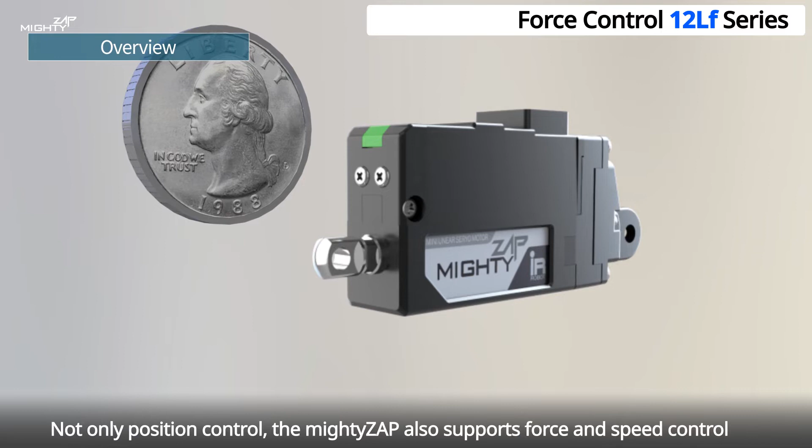Mini Linear Servo Actuator. Mighty Zap has been designed for precise linear position control in small space. Not only position control, the Mighty Zap also supports force and speed control, and there are many other parameters which can be adjusted for custom usage, such as compliance margin and acceleration-deceleration value to change control character.

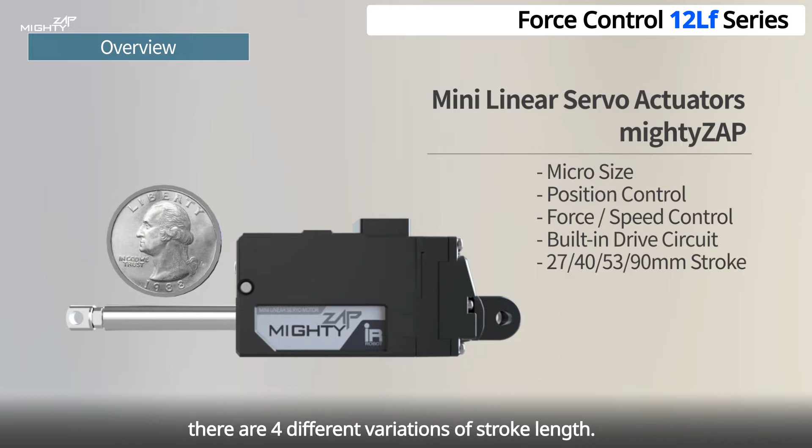From the shortest 27mm stroke lineup to the longest 90mm stroke, there are 4 different variations of stroke length. The Mighty Zap supports serial daisy chain connection, and 2 major alarms can be seen on the LED indicator, which are voltage and overload errors.

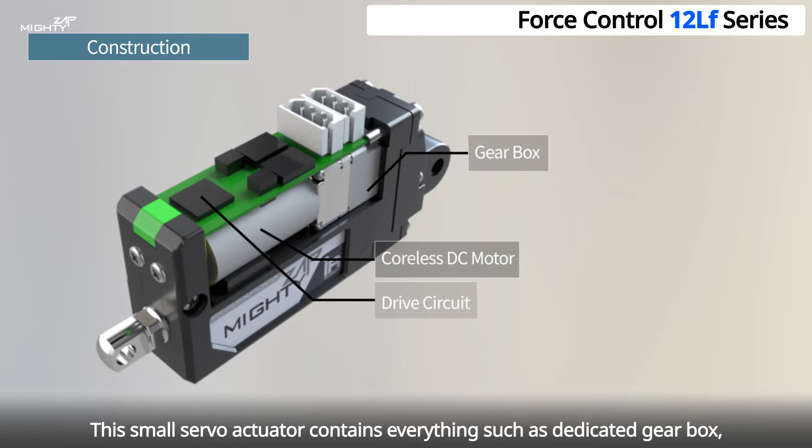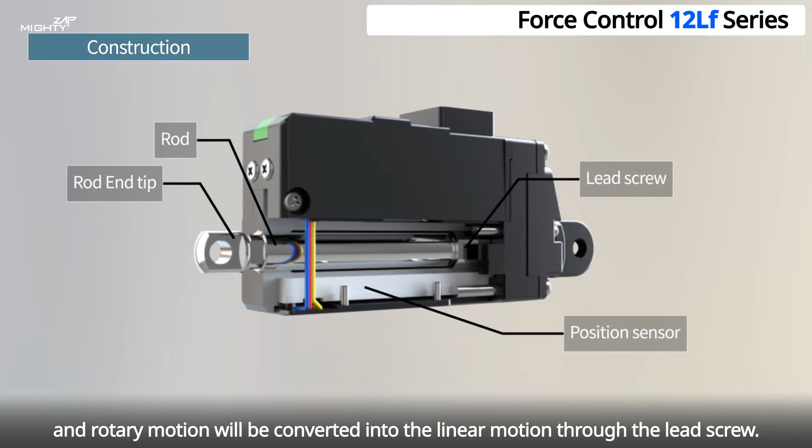This small servo actuator contains everything, such as dedicated gearbox, coreless DC motor, and even drive circuit for RS485 or TTL. It is also equipped with absolute type position encoder, and rotary motion will be converted into linear motion through the lead screw. The Mighty Zap can be used in various applications which need linear position control in small space, such as alignment, clamping, valve and stage control, dispensing, and etc.

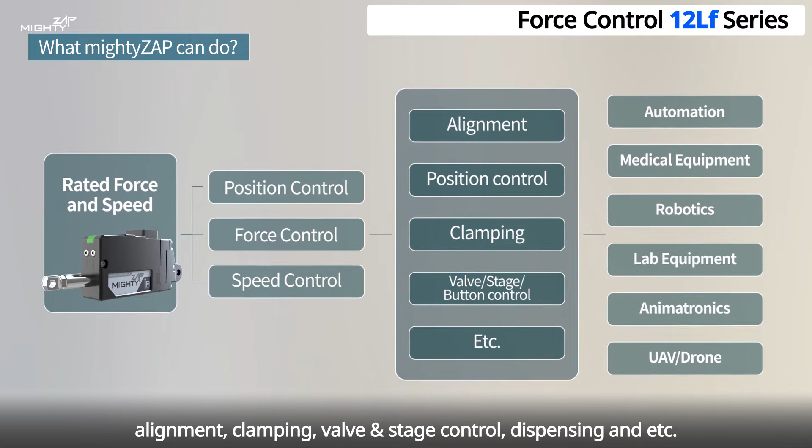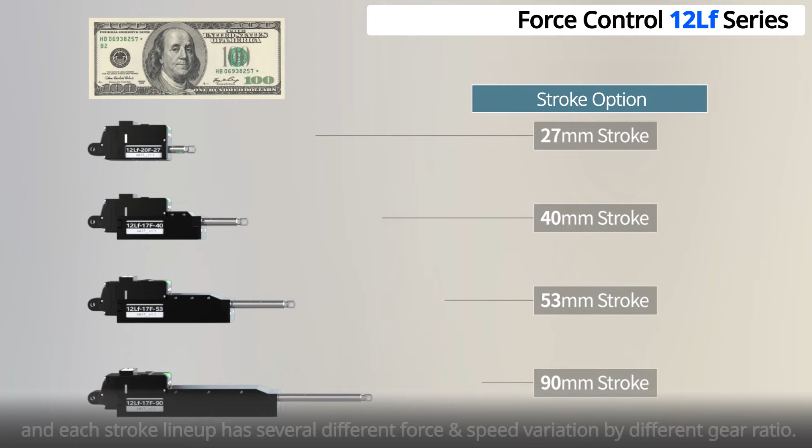There are 4 different stroke options: 27mm, 40mm, 53mm, and 90mm stroke. And each stroke lineup has several different force and speed variations by different gear ratio. The strongest force model supports rated 100 newtons, which is 10 kilograms, with the maximum speed of 7.7 millimeters per second.

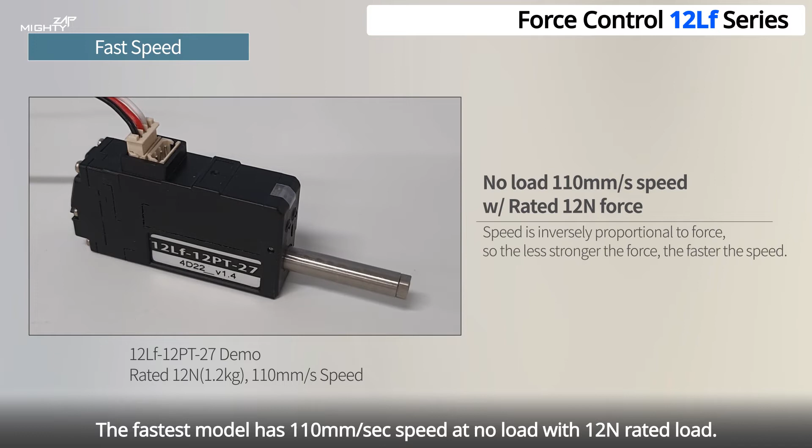Even if rated force is 100 newtons, maximum applicable force can be increased up to 200 newtons with reduced duty ratio. The fastest model has 110 millimeters per second speed at no load with 12 newtons rated force.

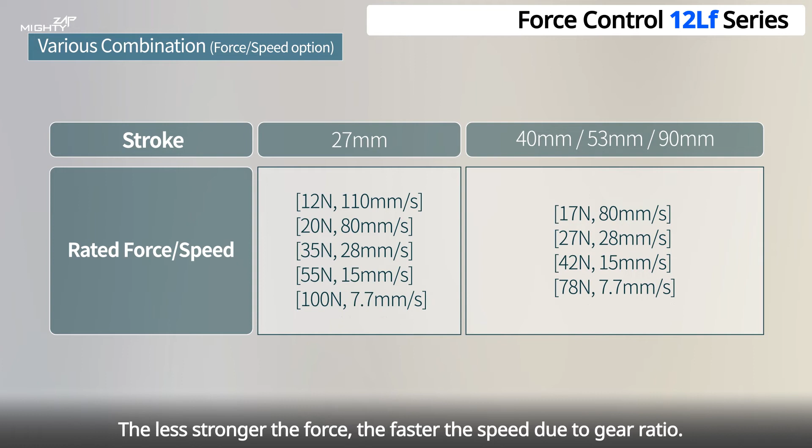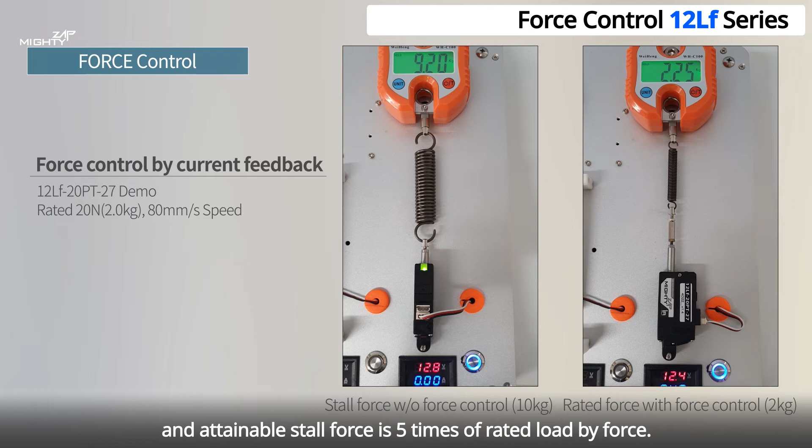Each stroke option has several different force and speed variations by gear ratio. The less stronger the force, the faster the speed due to gear ratio. The mightyZAP provides force control features based on rated force, and attainable stall force is 5 times of rated force by force control. Smooth speed control is also available in 1024-step resolution.

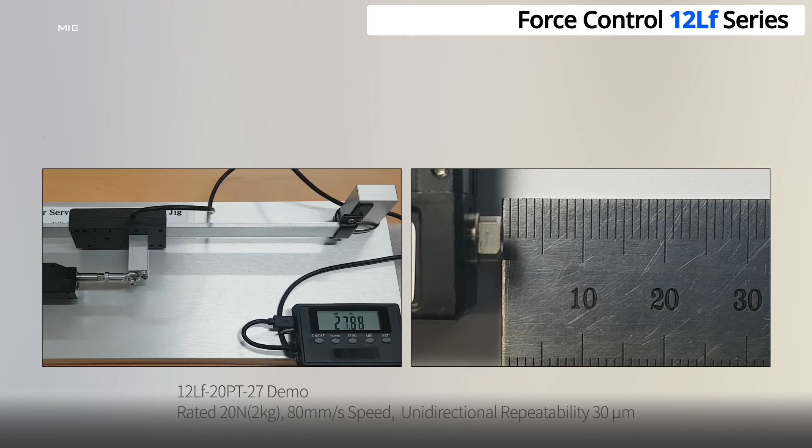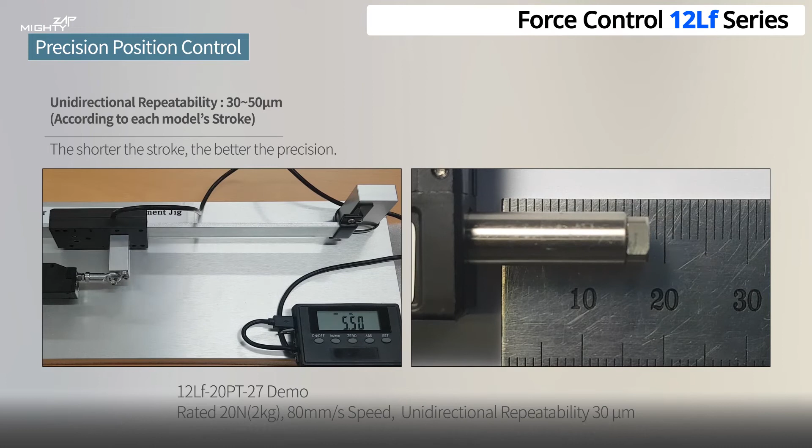Bidirectional repeatability for position control is between plus or minus 60 to 100 micrometers according to each model's stroke length. Unidirectional repeatability is 4 times better than the bidirectional. Thanks to the mechanical friction, mightyZAP provides a self-lock feature without motor power from certain gear ratio.

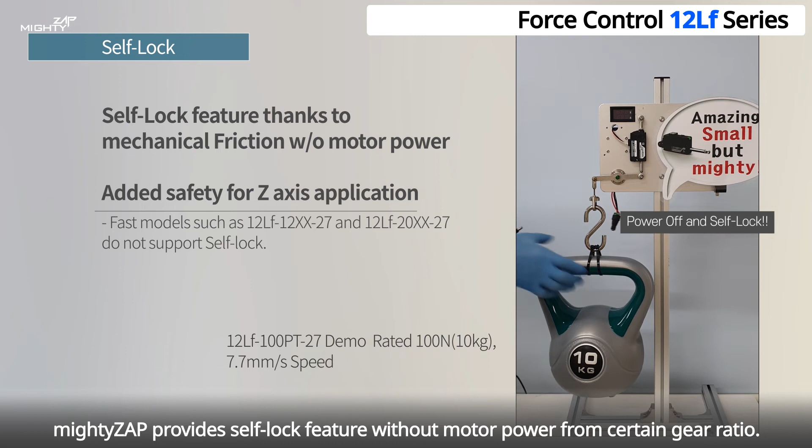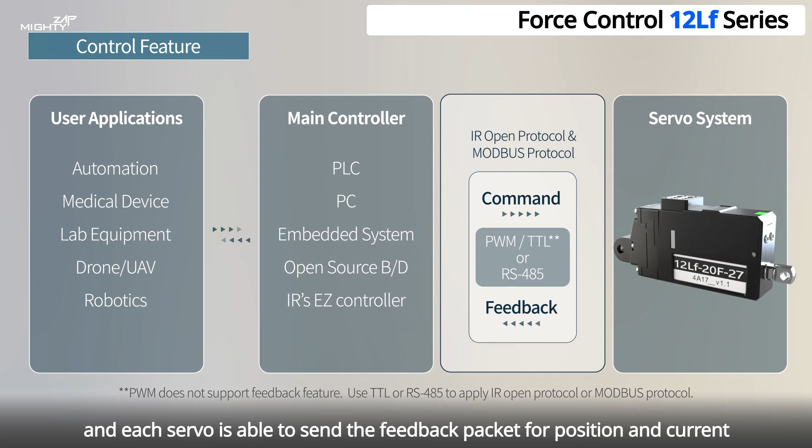Various command data packets can be sent from the main controller, and each servo is able to send feedback packets for position and current through TTL and RS485 communication. We provide our own protocol, and Modbus protocol will be added in the near future for easier industrial interface.

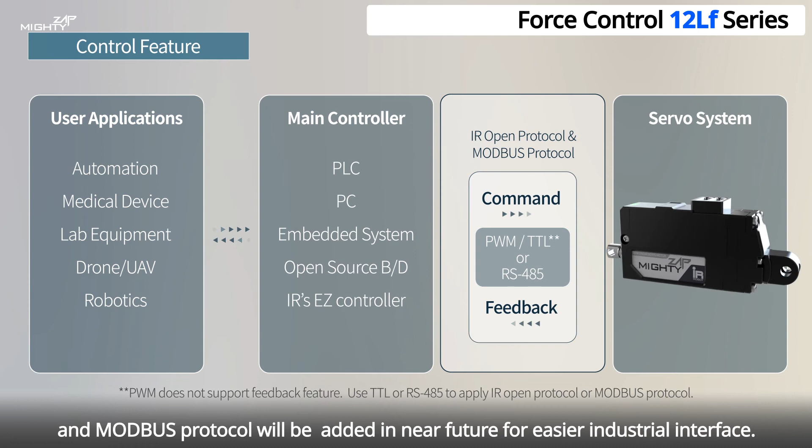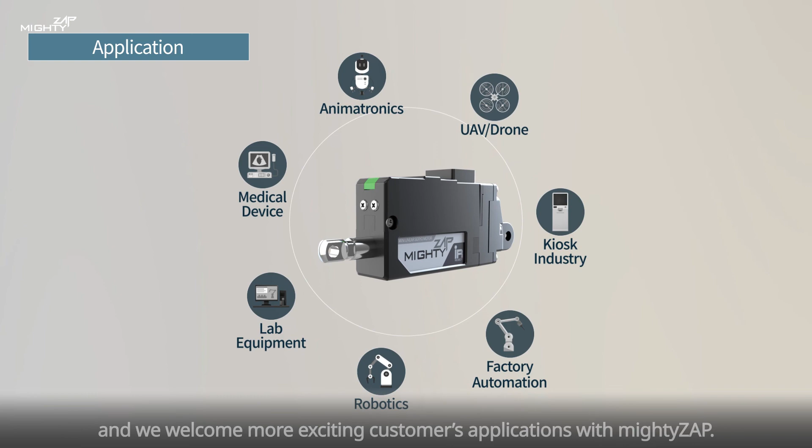The mightyZAP is being used in various industries with its unique features, and we welcome more exciting customer applications with mightyZAP. We help your great invention with our linear motion. IR Robot, the professional manufacturer for Mini Linear Servo Actuator.